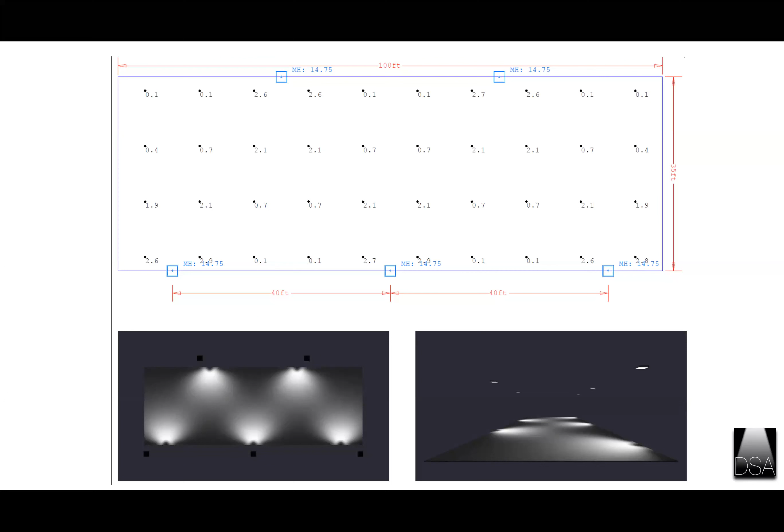So we just covered illuminance, and luminance at the bottom of this diagram is about our perception. It can be the lighting coming directly from a source or reflected light. Our experience of a quantity of light will be different on black asphalt versus a concrete paver. And that's because of each material's ability to reflect light.

So a good comparison would be 110-degree temperatures in the desert versus 110-degree temperatures in the tropics. Although the air temperature may be the same, our perception and experience will be very different due to other factors. So it's important to understand that illuminance and luminance will impact visibility and reassurance, which can also be called sense of safety.

So some of the elements considered in lighting design are safety, and that is whether or not the light levels are sufficient for a particular activity and application, or even whether they support the perception of being safe in a space. And then there's also standards that have to be met. So a design must meet minimum criteria such as those set forth by organizations such as the Illuminating Engineering Society, and also California Title 24.

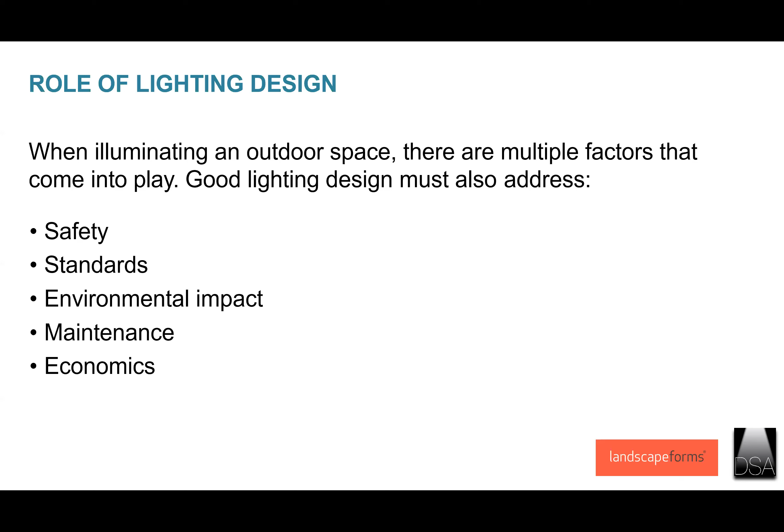So let's dig into the visual experience, which will cover glare, color rendering, and uniformity. And we'll talk about how each of these impact visibility and perception of safety. So we're going to talk about how we can tweak and adjust those variables within a luminaire to get the desired outcome.

The first thing to keep in mind is that we don't want lighting to give us the same experience that we have during the day. A more natural approach would be to use moonlight as inspiration. Outdoor lighting should mimic elements present at night in a natural way and adhere to the functions and mandates of nature. So this points back to the importance of considering the environmental impact of lighting outdoor spaces.

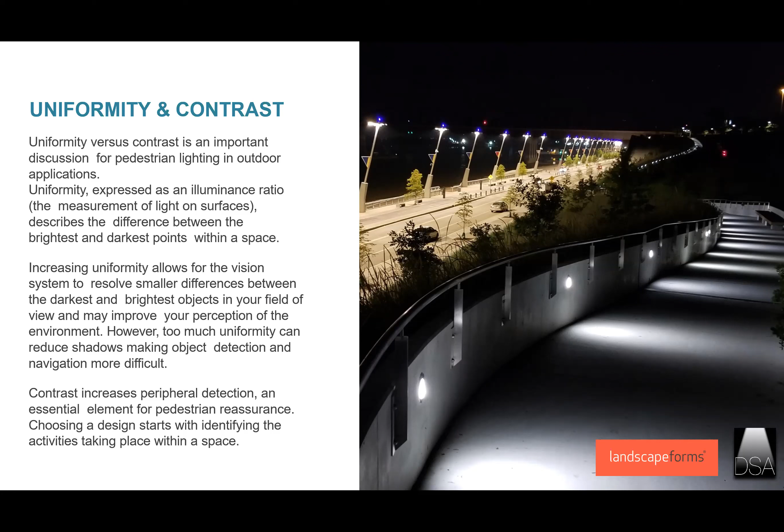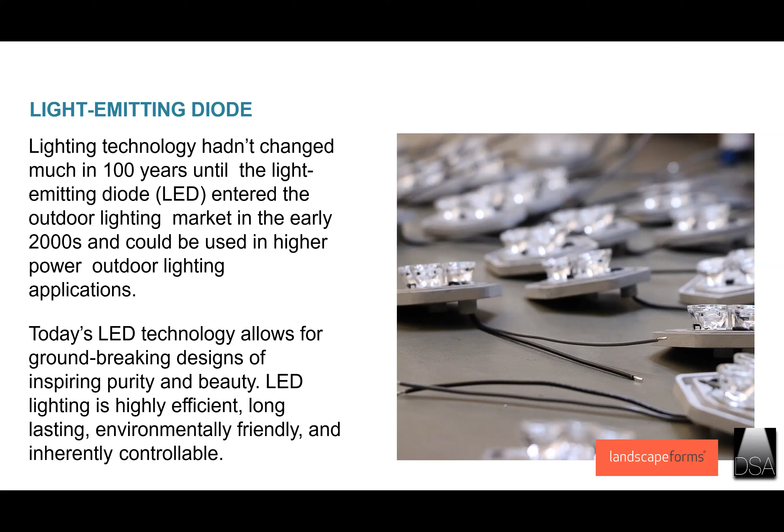So efficacy is a term that is interchangeably used with efficiency. It's typically measured in lumens per watt, and it's the amount of light produced for each watt of electricity consumed.

So if we look at this chart, we have the years 2002 to 2015 at the bottom from left to right, and on the left we have lumens per watt, so we go higher as we get to the top of the left side. If we follow this blue line that starts about where the efficiency of an incandescent fixture is, we can see that the LED has actually improved in efficacy or efficiency, and it continues to improve, where all of these other traditional light sources have remained the same.

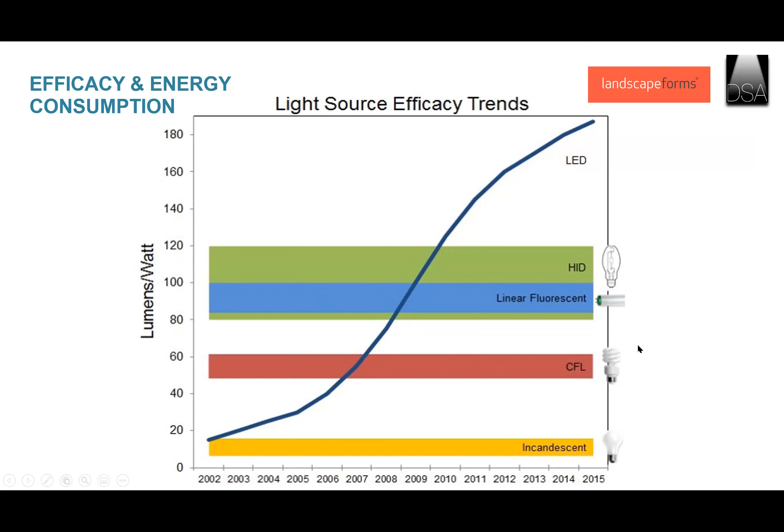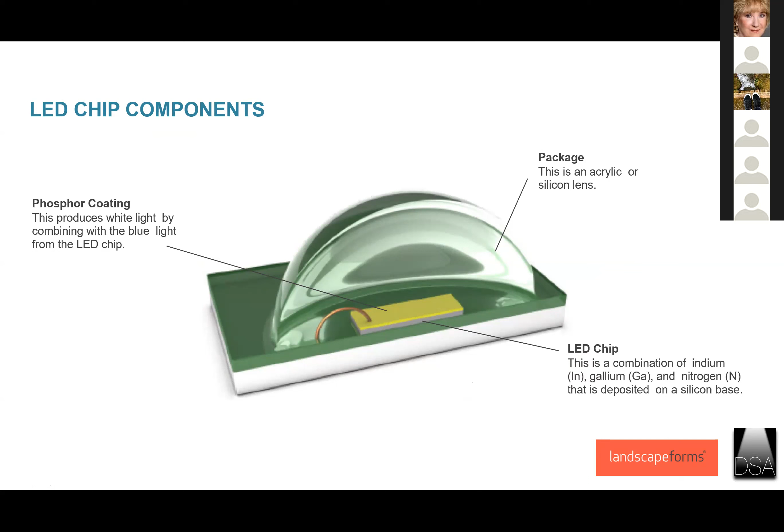Now, to look at an LED and what's involved in that, we have these components, and typically an LED chip is composed of a semiconducting material, and it's on a base of silicon and coated with yellow phosphor to produce the white light from the LED's blue light. And all of this is enclosed in what's referred to as a package, an acrylic or silicon lens.

So lumen maintenance is another important thing to pay attention to. It is the life cycle of the LED. The light output of an LED decreases over time. So on a spec sheet, there's often an L70 rating of, for example, 80,000 hours. And this is referring to the number of functioning hours achieved by a light source to the point that it depreciates to 70% of its original light output.

So to illustrate that, we have this graph, and it shows the thousands of hours at the bottom and the percentage of light output on the left. And the blue line, again, represents the LED lifespan. So there's this gradual depreciation from 100% output down to 70% output, and this gives you the thousands of hours in the bottom, which is 60,000 in this illustration. That is the lifespan of this LED.

So being aware of this gives the end user an opportunity to plan for future upgrades, and in some cases replacement of luminaire components. And these ratings will vary among fixtures. It's heavily dependent on how well a luminaire is designed.

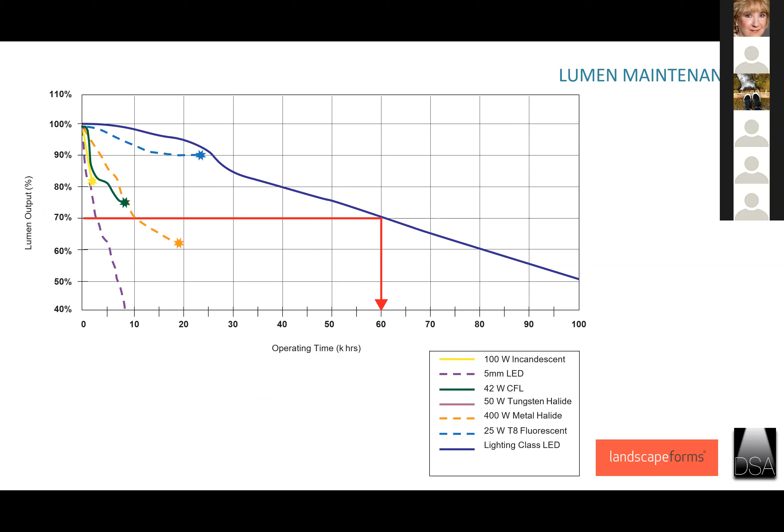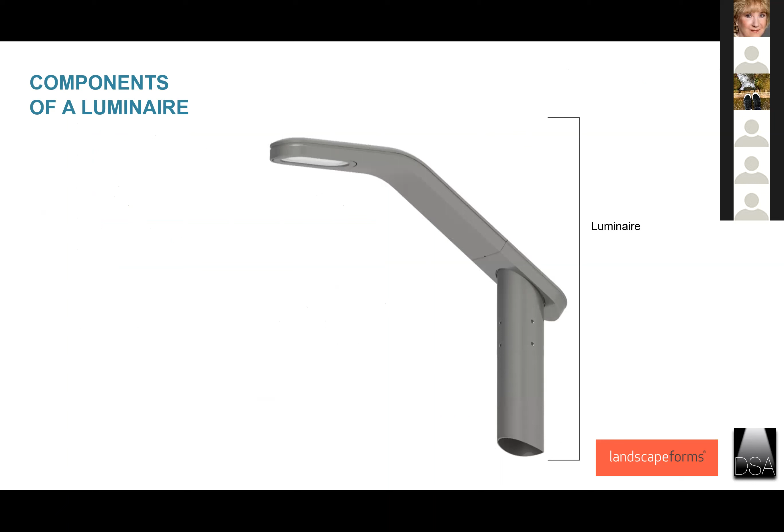The optics, which are sometimes referred to as secondary optics, aid in distributing the light from the LEDs and aiming it in different directions. Mary Kay is going to touch on the different distribution types as a result of those optics. And then we also have a diffuser lens. And this will soften or diffuse the light exiting the luminaire, and also aids in reducing glare.

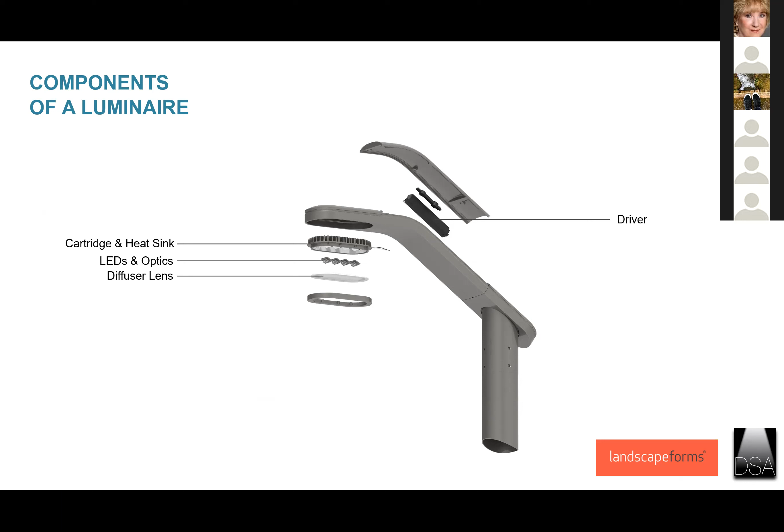And then we have the driver, and the driver delivers the appropriate amount of power to the luminaire. And then a lot of fixtures will have a surge suppression or surge protector. And these devices are an added measure of protection from spikes in power. So the idea is that if there were a surge in power, the relatively inexpensive surge protector would receive the damage in lieu of the driver or the luminaire. And lastly, we have the cover plate, and all these components work together to create a luminaire.

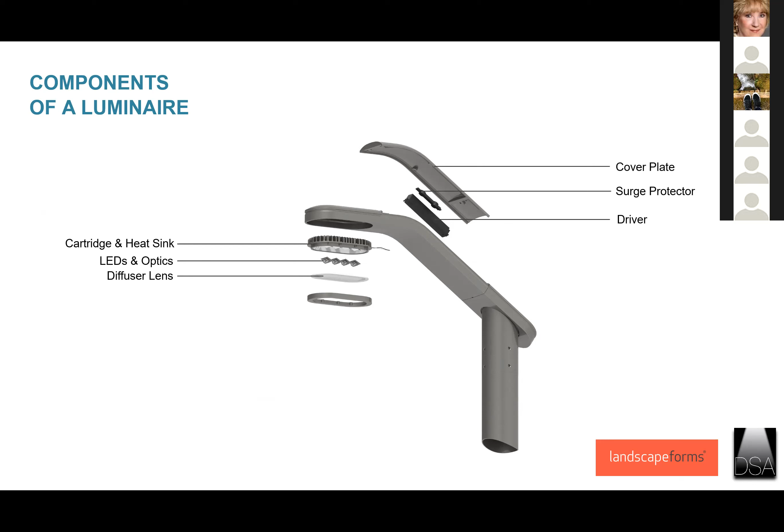So thermal management. One of the things that can greatly reduce the life and functionality of an LED is the heat it produces. So thermal management plays a critical role in preventing shifts in color temperature and premature failure. In the infrared image here, we see that the fixture is warmer where the LED cartridge is at the top, although it's only 60.0 degrees Fahrenheit, so that's relatively cool. And then as we go down the body of the fixture into the pole, those temperatures are reduced. So the heat is dissipated from the source down into the aluminum components and into the ambient air.

And heat sinks are designed similar to this fin-like image we see here at the bottom. And they're really grooves and spaces that encourage airflow and aid with keeping the LEDs cool.

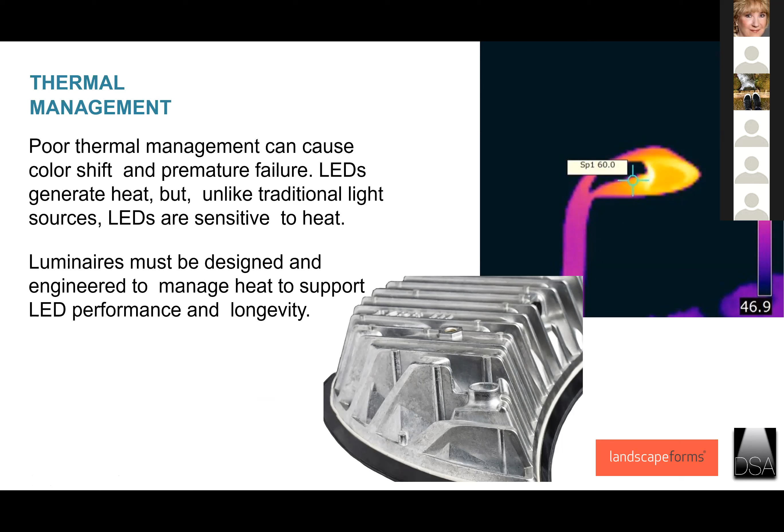And this is just a quick little diagram provided by Structura that illustrates the smart city and the multiple layers that are possible with components that can be added, adaptive lighting elements that can be part of a whole system in a city.

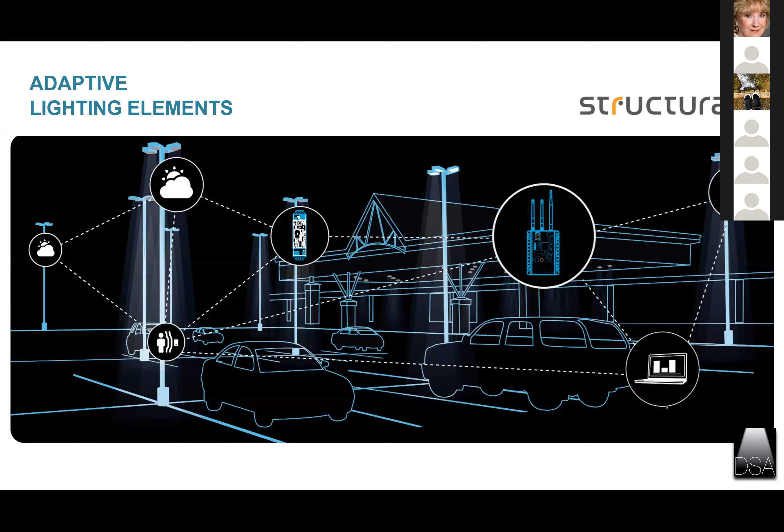So maintenance and service. The longer lifespan of an LED actually reduces the amount of maintenance required, but there is a level of maintenance that each manufacturer will instruct as being essential to the effectiveness of the system.

And selecting luminaires that ship pre-wired and fully assembled, if they have a quick method of disconnecting and replaceable LED cartridges, drivers, and things like that, that makes things so much easier. And honestly, this type of criteria will be met by the reputable manufacturers in our industry. And there are features that go above and beyond.

For example, Bega has a 20-year promise, and they guarantee that they will continue to supply compatible LED modules for 20 years following the purchase of a luminaire. So this means an end user doesn't have to purchase an entire luminaire when the life of an LED module expires. If it's within that 20-year period, they can get an LED module replacement and keep that fixture.

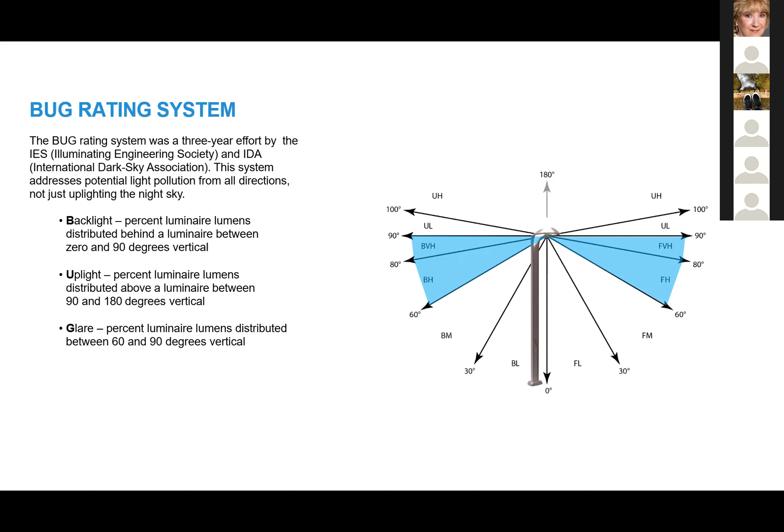And glare, as Niki talked about earlier, in this instance, describes the amount of light that is distributed between 60 and 90 degrees vertical. There's something to remember about BUG ratings, and that is that there is no bad BUG rating, just inappropriate applications.

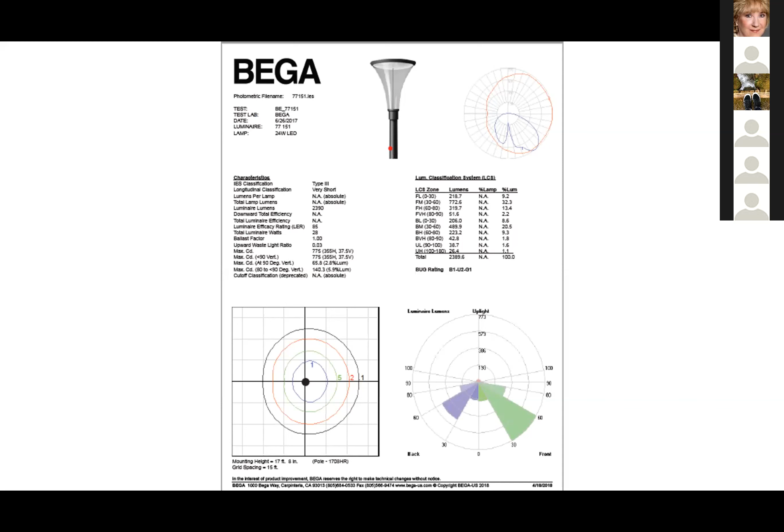This is a typical Bega specification sheet. The BUG rating is shown in the middle right of this page. The larger the number, the more light trespass there is. So a fixture with an uplight rating of 2 has more light going up above the top of the fixture than a fixture with an uplight rating of 0. A wealth of other information can typically be found on the specification sheets for most manufacturers.

You can find more information about the International Dark Sky Association, or IDA, including a list of fixtures that meet their criteria, on their website, which is www.darksky.org.

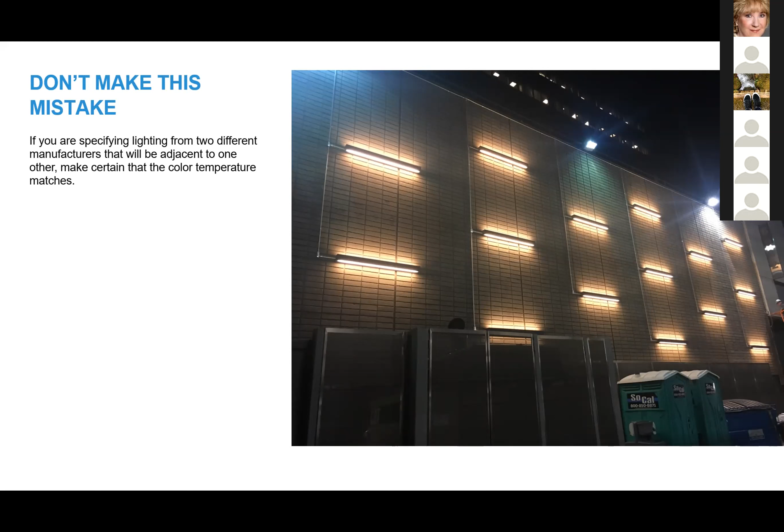This slide shows a photo that I received from a client in Los Angeles. They had specified the lighting mounted on the walls and the spotlights above it from two different manufacturers, both to be 3000 K. But when they were installed, to their horror, the lights were two radically different colors. Be aware that each manufacturer of LEDs may define their color temperature slightly differently, and the colors may fall within a range as opposed to one set value. If you have a similar situation and must use fixtures from two different manufacturers in close proximity to one another, you might want to request a sample from each manufacturer and look at them next to one another.

Another reason why it is important to specify outdoor lighting to be between 3000 and 4000 K is that bluer light mimics daylight, which can disrupt the circadian rhythm of all human beings. I'm sure you've heard recently that you should not look at your phone or your computer screen late at night because it can disrupt your sleep. It is the same principle at work here. Some scientists believe that other living creatures, including plants, might also be impacted by exposure to bluer lights at night.

There are some areas of the country that already mandate the use of amber-colored lighting near coastal areas where sea turtle migrations occur. Turtles don't see amber lights and therefore they don't impact their migration or breeding patterns. Several of the manufacturers that we represent offer amber LEDs as a standard.

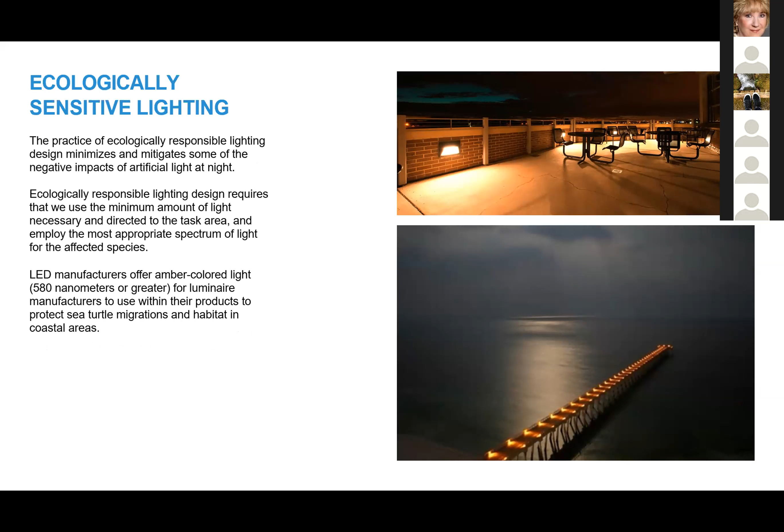Whether you are trying to meet the criteria of one of the environmental rating systems or not, hopefully you are all concerned about the natural environment and how the products that you specify could be impacting it. LEDs are much safer than fluorescent sources because there are no toxic chemicals used. Do your best to specify fixtures that are made from a recyclable material such as aluminum or steel. Also consider packaging, manufacturing locations, shipping methods, manufacturing processes, and energy consumption.

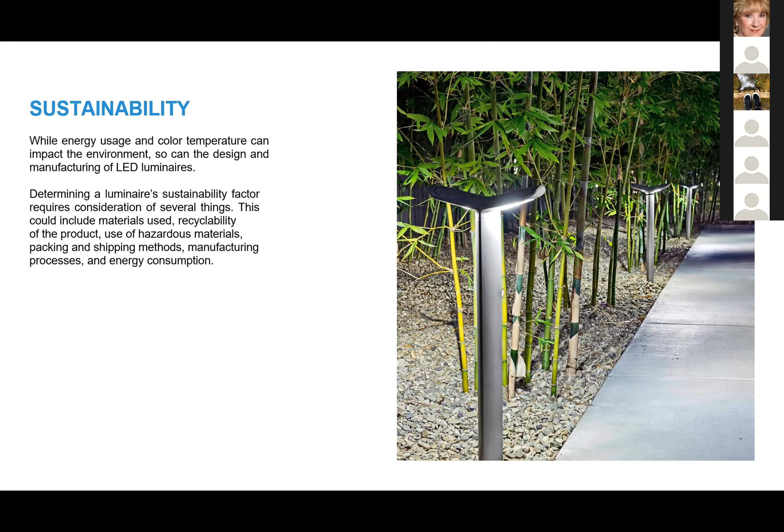Also closely aligned with being environmentally minded is being mindful of quality. Light fixtures that will fail within a short period of time are not a bargain financially, nor are they an environmentally sound choice. If your contractor is trying to substitute an alternate fixture to one that you know and believe is a high quality choice, do not hesitate to order a sample of both fixtures and evaluate them side by side, possibly even in front of your client. Generally, the full cost savings are not passed along to the client, but end up in the contractor's pocket, and your client ends up with an inferior product.

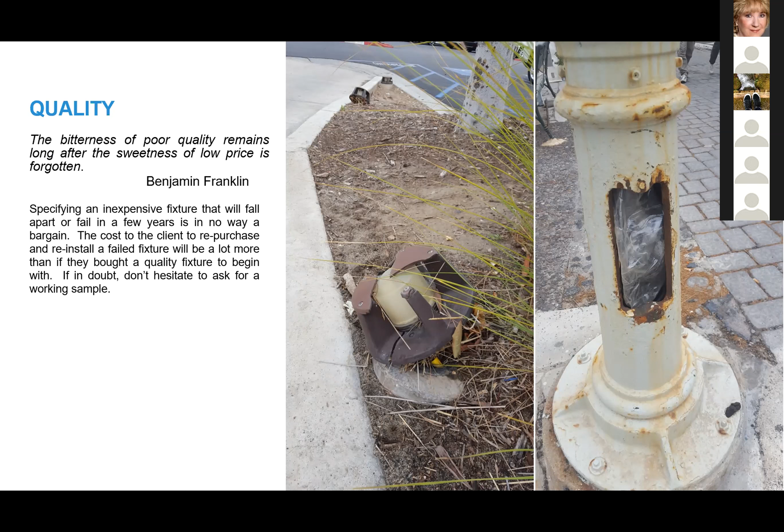This example, courtesy of Bega, shows a project at UCLA. This original fixture was specified for phase 1 of a project. Note the color of the lens in the close-up and also the base of the pole. A couple of years later, when phase 2 was built, the contractor substituted a less expensive but similar looking fixture. The slide on the right is the substitution fixture.

Look at the lenses of the substitution. They turned yellow and clouded within a short period of time. The arms that support the lights are much more flimsy than the original. In fact, you can even see bare wire on the photo on the left-hand side. Also notice that the base is already showing signs of wear and tear, even though it is newer than the phase 1 fixture.

Lastly, be certain that any fixtures that you specify have one of the safety and fire rating certifications. There should be a physical label on each luminaire. Underwriters Laboratory, or UL, is the most common and well-known testing entity, but Canadian Standards Association, or CSA, and Electrical Testing Lab, or ETL, are also quality labs and are becoming much more commonplace. The CSA label needs to have a US on it in order to be valid certification in this country.

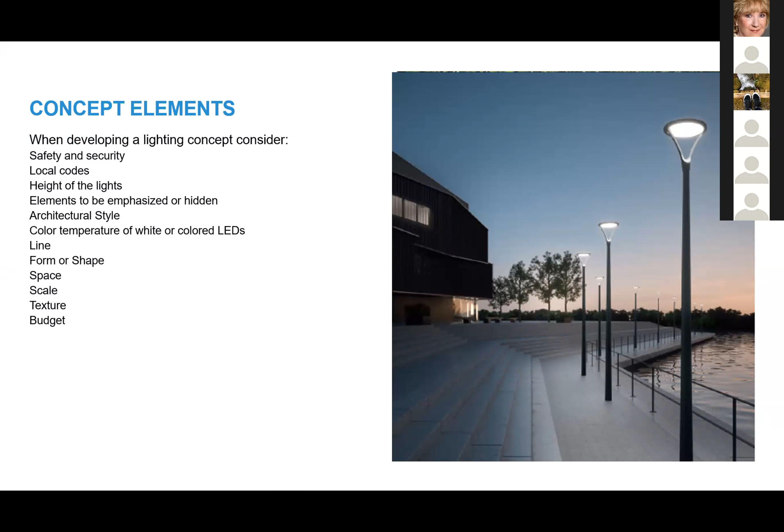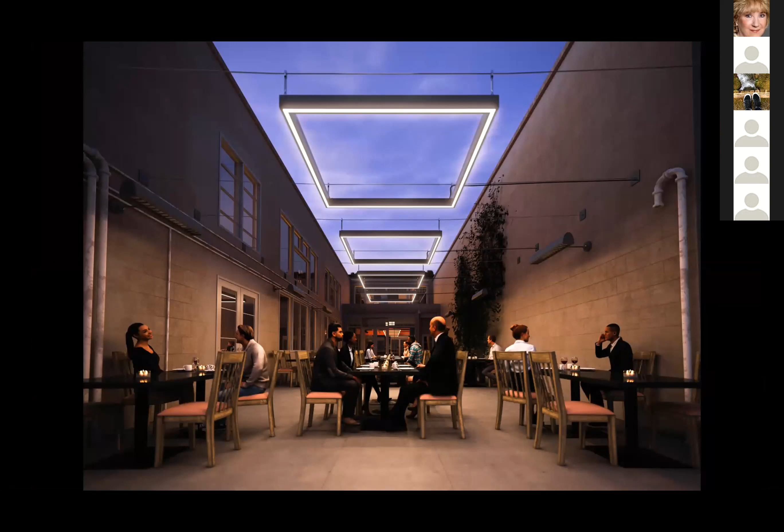This next slide is an outdoor dining area which was lit with custom Structura Aura fixtures that have been catenary mounted from the adjacent building walls. Do you consider this a successful application?

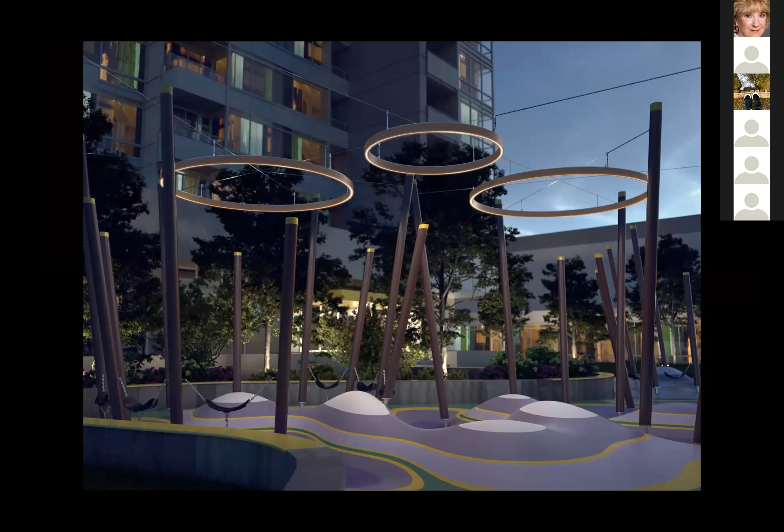And these are round versions of the same Structura Aura fixtures, here used to provide lighting at a playground area. These catenary fixtures were suspended from some of the poles at the perimeter of the space.

Oops. Oh, there we go.